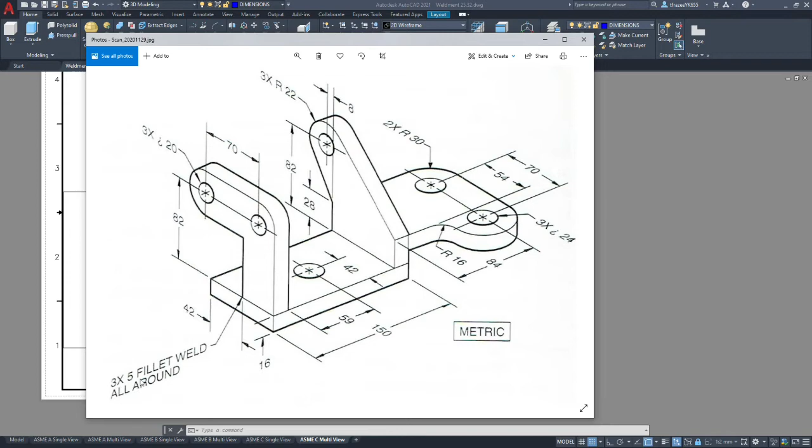And our drawing calls out for 3 times 5mm fillet weld all around. Now AutoCAD Mechanical has a symbol that you can use, and possibly in the older versions of AutoCAD it was included, but they've separated the weld mechanical symbols into a separate version of AutoCAD. So you have two options. You can either download AutoCAD Mechanical and use the weld symbol tool, or you can manually make the weld symbols, which is what I'm going to show you how to do, because this lesson is the last one. You're only doing one weld drawing, and what's important is you understand the symbology and how it functions.

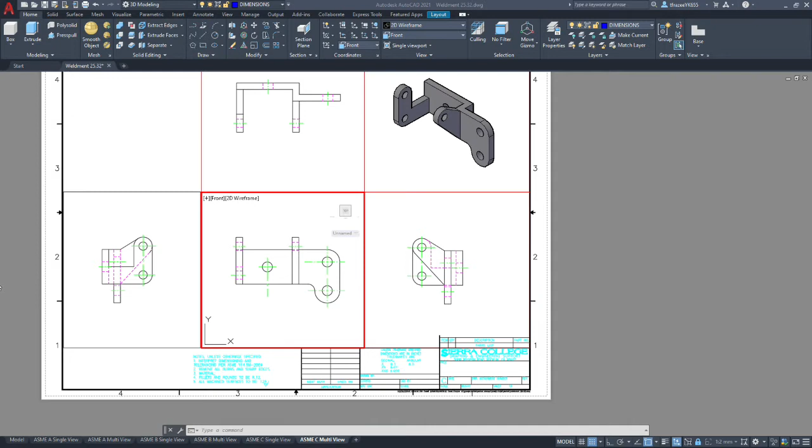So we're going to start with our 3 welds. We have one that goes around this hidden line all the way around the base. We have one that goes around the base of the second flange, and then in the side view we have a third one that goes around connecting this flange to the vertical flange. The callout's going to be more or less identical for these if you do them in the views I'm doing them in.

We're going to go to the Annotate tab, and we're going to use the multi-leader. Make sure you're set up for metric scale. And I am going to have an object snap on as nearest, but I don't want it to snap to anything else. And we're going to leave ortho off at the moment.

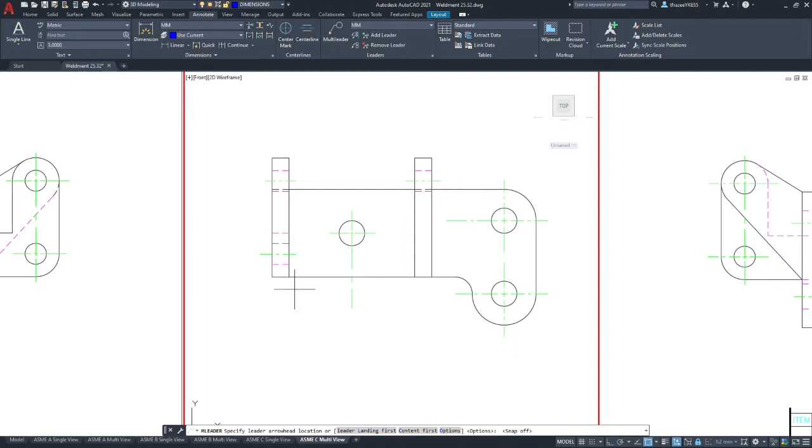So we'll do this first weld. It goes around this hidden line, down, across. Now we want to put the symbol so it doesn't look like it's pointing at, say, one of these holes or something. So I'm going to pick here, and I'm going to draw my symbol down. And we're just going to accept the leader line as it is. We're not going to type any text at this point. Okay, so again, our drawing says we're going to weld on that edge, and we want to put a 5mm fillet.

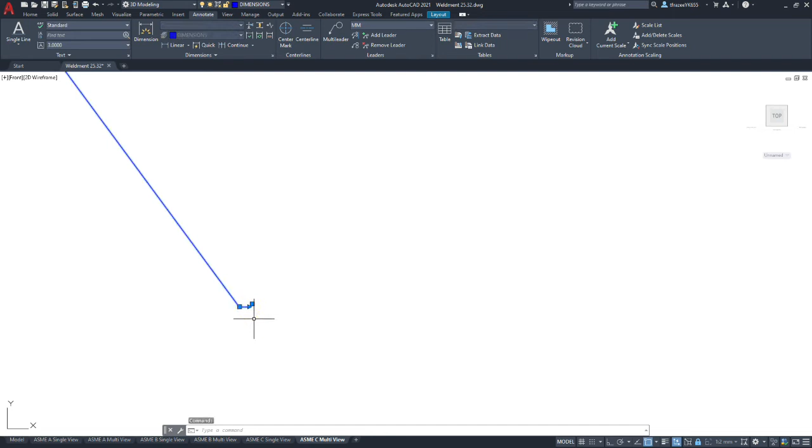So we're going to zoom in, and we're going to extend the landing so it'll look like a weld symbol. We may need to adjust that based off the numbers we type. Now any number that occurs below this line is on the same side as the arrow. Any number that occurs above the line occurs on the back side of the part, the opposite side from which the arrow is pointing at. We want the fillet weld to be on the side we're looking at.

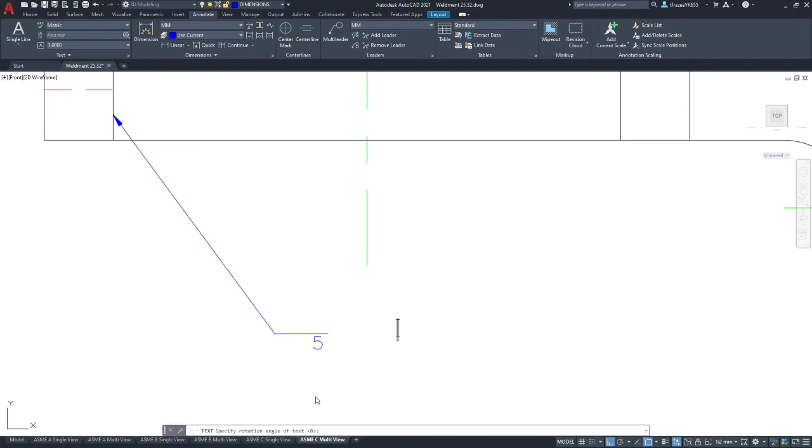So we're going to do a single line annotation, and for this I am going to turn on ortho, and we need to write the size of our weld, which is 5mm. Okay, so once we've done that, we need to tell the viewer what type of weld it is. So it's a fillet weld. So we need to put the fillet symbol on this.

So we're going to go back to Home. Go to the line command, and we draw a triangle with the vertical leg. It's going to be next to the number, and it should be about the same height as the number. We turn ortho off, and we finish our triangle. So that's saying we have a 5mm fillet on the arrow side of the dimension.

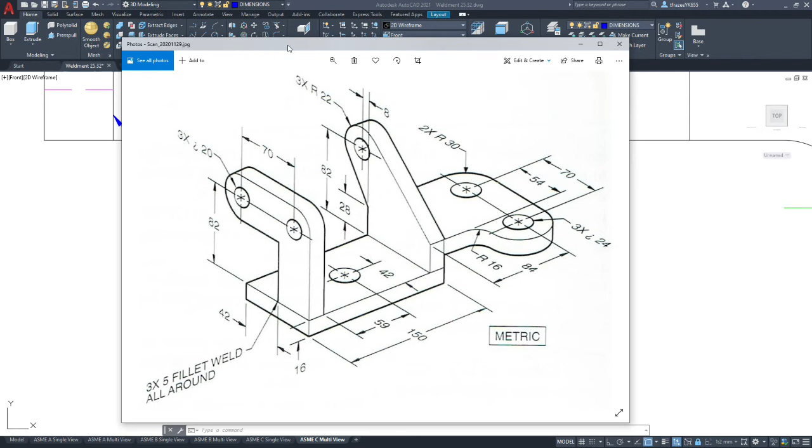Now our drawing says that that fillet goes all around. It's not just on this inside edge. So to do so, we add a little circle to our symbol. And that tells you that it's a 5mm fillet weld that's going all the way around the feature. And that's about it, so you need to do that again in another location.

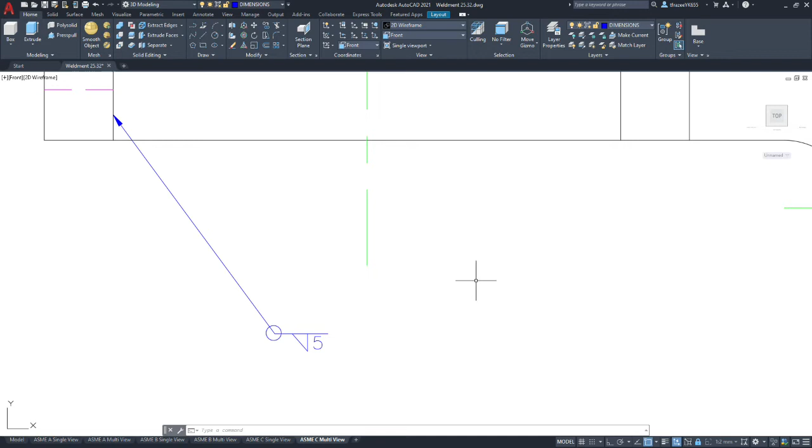So let's do that. We're going to go to Annotate, Multi-Leader, and we're going to select on the edge here. We want the inside edge because the weld that we're calling out actually occurs at a lower level than the flange on the right. Okay, and we're just going to accept that leader line.

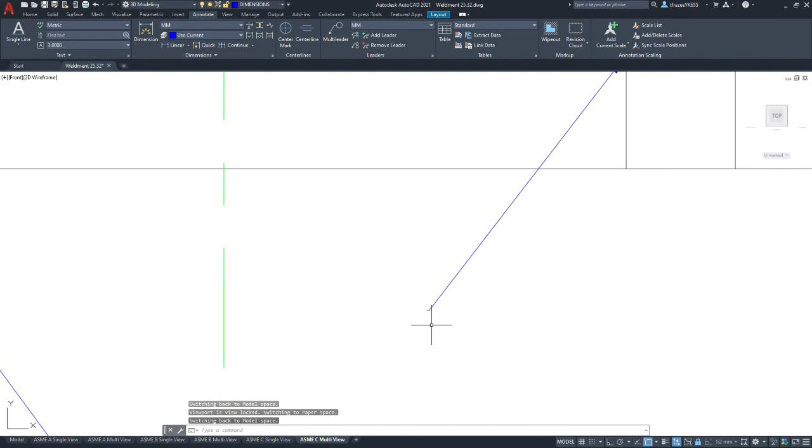We're going to zoom in. You're going to select on it once. You're going to pick on the arrow once, and we're going to make the landing line longer. Yeah, it looks like that might not be long enough. Let's go longer. Okay. Now again, we put in a single line, and it's going to be a 5mm. So we need to pick about here, and 5mm is the size of our weld.

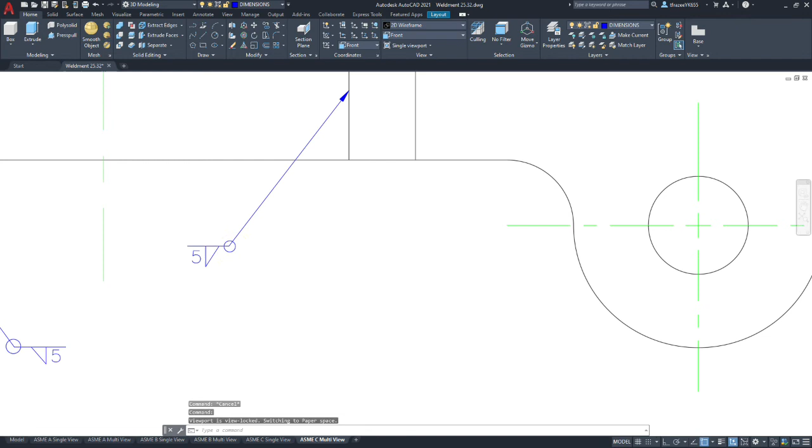And then we need to tell the viewer that it's a fillet weld. So we're going to go Home. We're going to go line. We're going to start there. We're going to make it a little bit taller or the same size as the lettering. We'll turn ortho off and complete our triangle. And we want to tell it we want to go all the way around that plate. So we're going to draw a little circle. Or you could copy the circle from the other one. And that tells the viewer that it's all around.

Now we have one last fillet weld to call out, and it goes all the way around this feature. So we go back to Annotate and Multi-Leader. And you could put it on either side of this feature, it doesn't really matter.

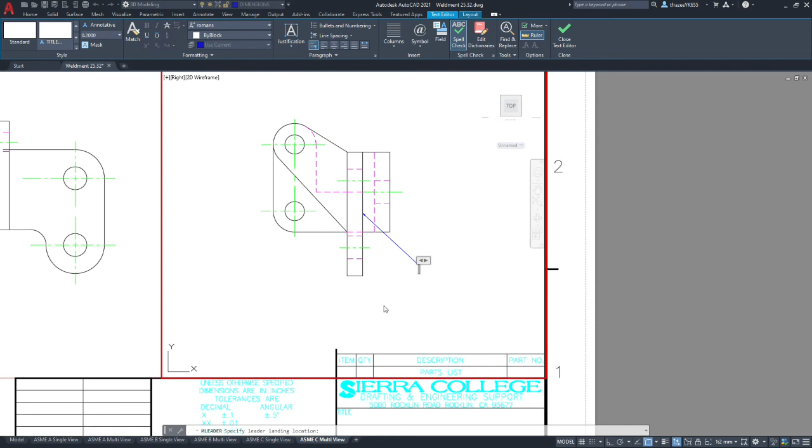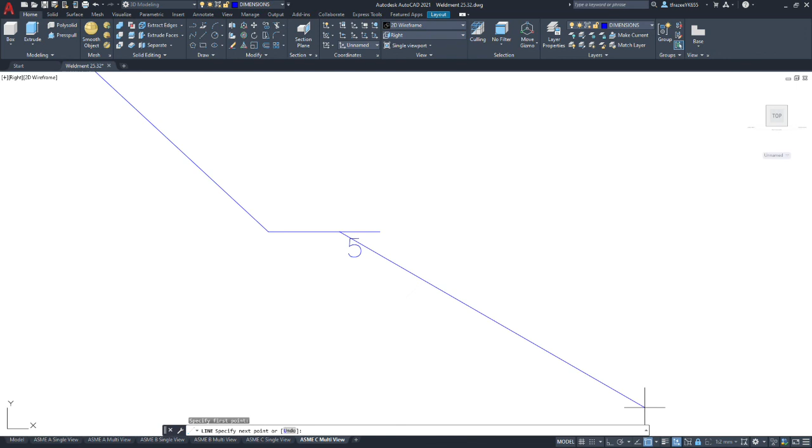Okay, so we're going to do our annotation. We're going to accept that annotation. We'll zoom in, pick on the arrow, make our landing longer, do a single line. We'll select there, it's going to be 5. And then we need to draw the fact that it's a fillet. And then it's on the same side of the material as the arrow is pointing at. And that weld is going to go all the way around the edge that's referenced.

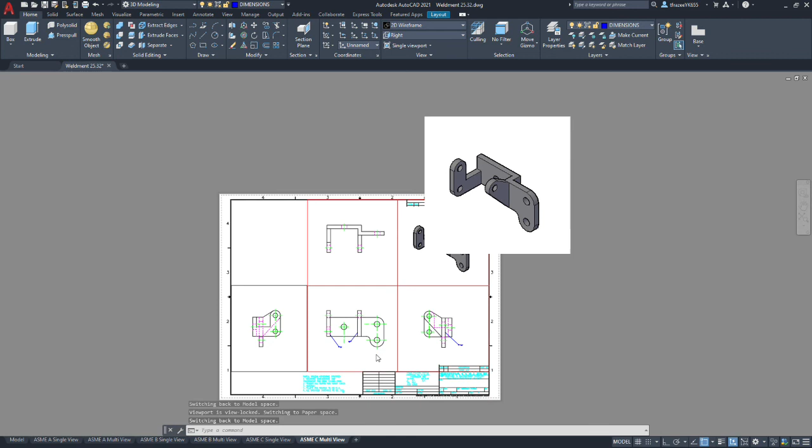There you go, you got your 3 weld symbols. You may need to adjust their locations. And remember, this needs to be fully dimensioned when you turn it in PDF format in black and white.